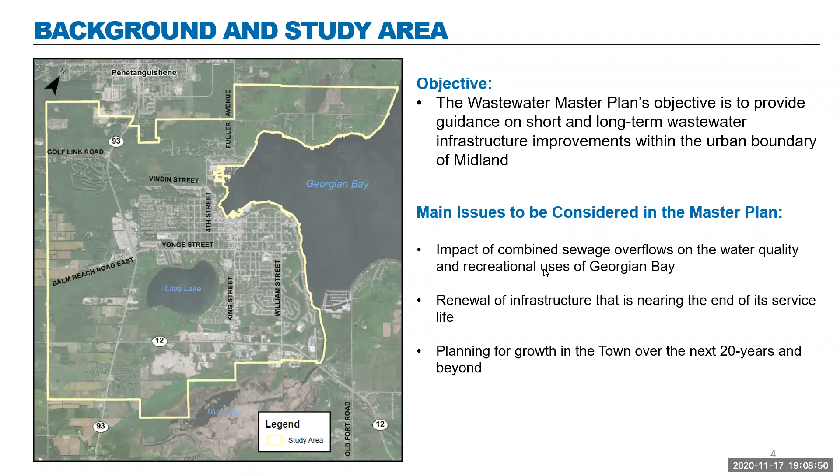Looking next at the specific objectives of the Midland Wastewater Master Plan. The goal of this master plan, and really of all master plans, is to put together a roadmap for infrastructure development for the near term and the long term, to make sure you can address the needs of the existing community and the future community. Specifically, we're looking at mitigating the impacts of combined sewage overflows on Midland Bay and Georgian Bay, the need for infrastructure renewal as infrastructure reaches the end of its life, and perhaps most importantly, planning for growth, looking at what we need to construct to meet the future needs of the town.

To do that, we've followed 4 relatively straightforward steps that I'll walk through tonight. The first is to identify the existing infrastructure, look at its existing capacity, how old it is, its performance, and then look at what is required for growth in the next 20 years, and we'll also look beyond the next 20 years. Then we've simulated or modeled what that future condition looks like to identify some of the deficiencies within the system as you start to accommodate that growth. Once you've identified the deficiencies, we'll look at ways to address them both in the near term and the longer term.

Before I get into the specifics of the system, does anyone have any questions on the master plan process or the process we followed throughout the study? Great, seeing none, I will keep going.

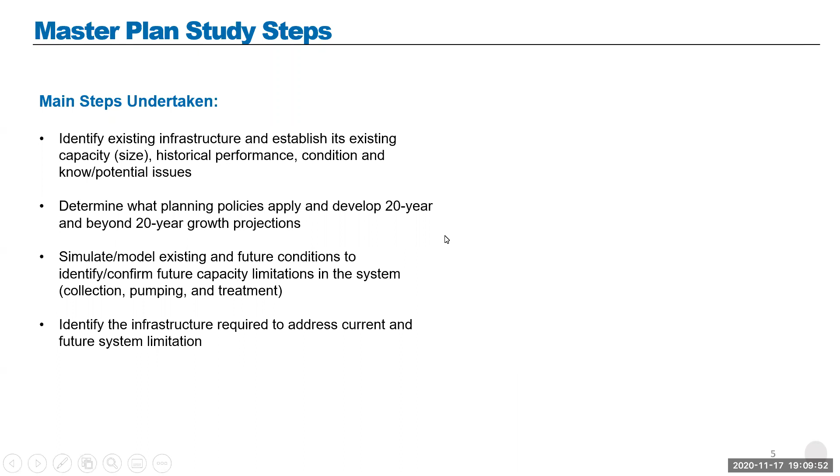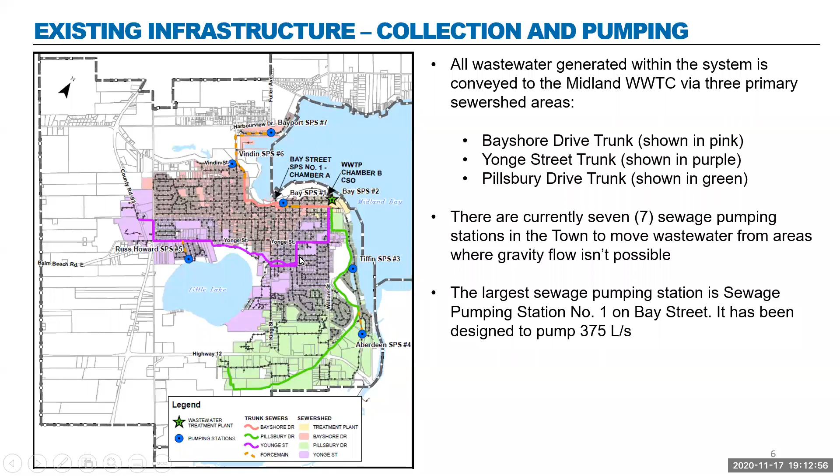The next thing we'll look at is the age of the collection system. There are pipes in the ground throughout Ontario that are well over 100 years old. That doesn't mean you should keep pipes in the ground for that long without replacing them. Typically, we look at replacing wastewater sewer mains around the 60-year mark, somewhere between 60 and 80 years.

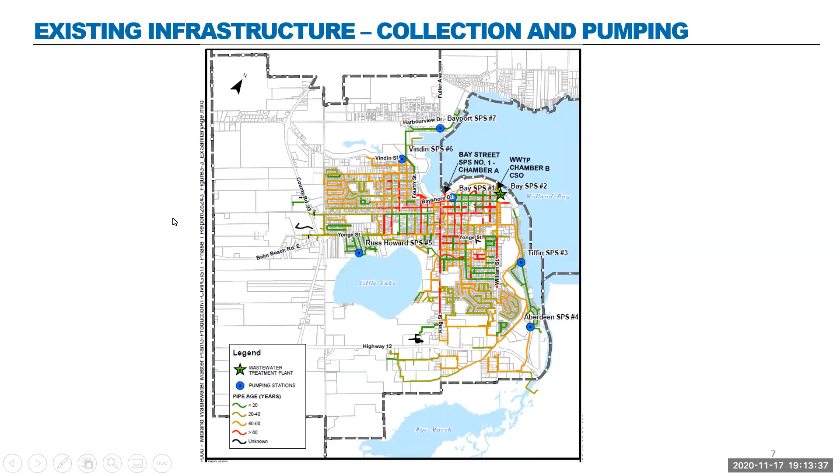If you look at the Midland collection system on your screen, the pipes in red are all those older than 60 years. Some of those sections have been replaced in the last couple of years, but you can see there are a number of sections in the original part of town where the sewers are older than 60 years.

Once we looked at the age, the next important thing was to look at the capacity of the existing trunk system. We want to make sure that when you flush the toilet, on an ordinary day or a very rainy day, there's enough capacity in these sewers to convey all of the sewage to the wastewater plant. We don't want it backing up into people's homes, and we certainly don't want flooding at the surface.

So what we did is we built a computer model to look at the impact of different rainfall events on the collection system. We ran the simulations for a 1 in 5 year storm, a 1 in 10 year storm, and a 1 in 100 year storm.

A 1 in 5 year storm is a relatively small storm that you would expect to happen approximately once every 5 years. These 1 in 100 year storms are much larger, and you would expect them to occur less frequently. However, you want to make sure your collection system can handle the flows that would occur under any of these events.

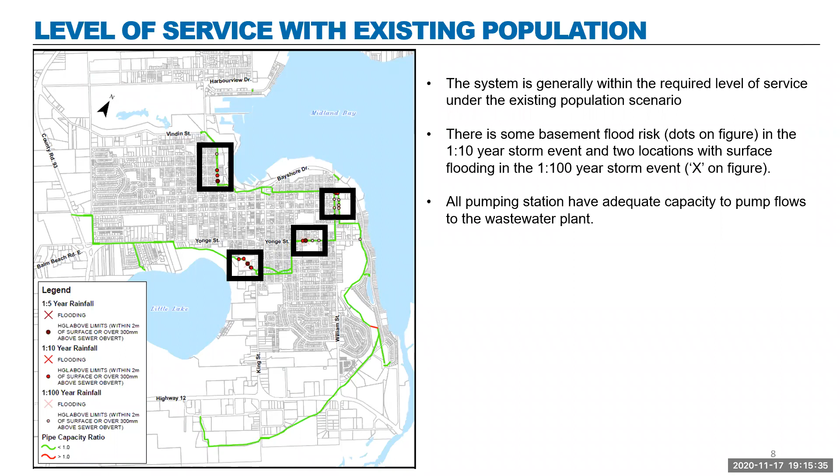So there's a need to increase the capacity of these sewers to make sure all the wastewater is conveyed to the plant, particularly during larger storm events where there's potential for larger flows in the system. Under the existing service population, all of the sewage pumping stations have adequate capacity to pump the flows. This means that at this point, most or all of the wastewater that enters the system is making its way to the plant.

Wastewater enters the front of the plant, which is called the headworks. Here is where all the bigger pieces of waste get screened out - things like sticks, flushable wipes, or rags. The headworks is there to catch those big things, so making sure you don't flush those down the toilet is important, as it makes the headworks' job much easier. That's the first stage in this process.

The next process is the primary clarifiers. In the clarifiers, the wastewater velocity is slowed down so that some of the smaller particles can settle out to the bottom of the clarifiers.

From there, the wastewater is sent to the aeration tanks. In the aeration tanks, like the name suggests, air is added, and this helps bacteria to grow - those bacteria are what help treat the wastewater.

From the aeration tanks, it goes to the secondary clarifiers, which work in a similar way to the primary clarifiers. Again, the velocity is slowed down so that all that bacteria and waste can settle out to the bottom of these tanks. From there, the wastewater goes for disinfection. Because it's being discharged to Midland Bay, it has to be disinfected, in this case with chlorine.

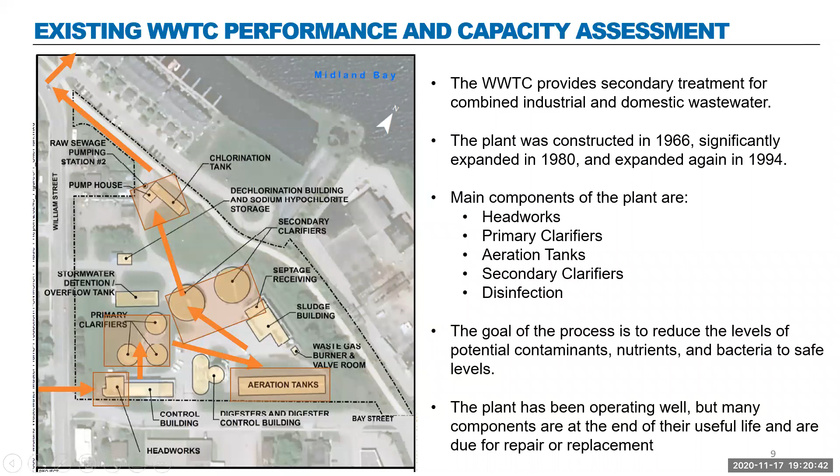Great, all right, I will keep going. In Midland, you are in the unique, although not that unique, position of having combined sewers. Combined sewers are when you have storm sewers that tie into your sanitary sewer. This means under wet weather events or rainfall events, storm water mixes with the sewage and has the potential to overwhelm the system.

And so when this happens, right now at the plant and at Chamber A, which is at the main sewage pumping station, a bypass occurs of this combined sewage, which is a mixture of mostly rainwater and some sewage. This occurs almost every year in Midland, and there are standards set out by the Ministry of the Environment to mitigate the risks associated with these combined sewer overflows on the environment.

Some of the key requirements of that procedure are that combined sewage overflows can't occur during dry weather periods. This means you can only have bypasses of the plant during a wet weather event. During the wet weather months, from April to November, 90% of the wet weather flow has to be captured or treated, so only a maximum of 10% could be bypassed. And as your population grows, there can be no increase in the volume of waste or wet weather flow that is bypassed.

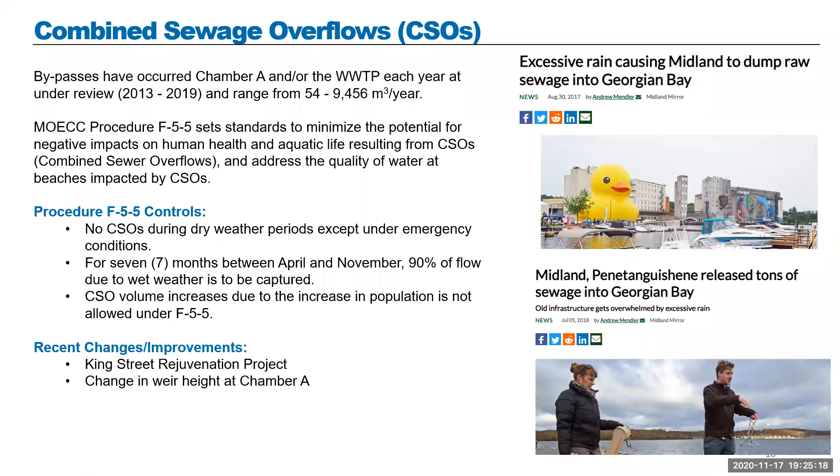Great, so that's the collection side of the combined sewers. I want to talk briefly about what happens at the plant during these big events. Right now, when you have a big storm, wastewater starts entering the plant just like it always does. Once the capacity of the plant is reached, the surplus flows are diverted to an equalization tank, which is just a big tank that fills up with the combined sewage. Once the storm is over, it can be pumped back to the plant and treated the usual way. This is what happens during, let's call it, a medium storm.

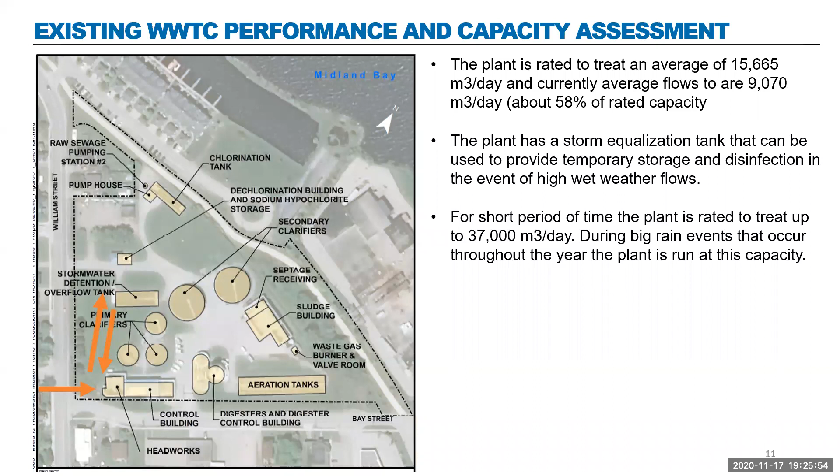But during a very large storm, wastewater comes into the plant, it accepts as much as it can, and once that capacity has been reached, flows are diverted again to the equalization tank. If it looks like the equalization tank won't be able to hold all of the flows coming in, the plant is then bypassed, and these flows go out through the outlet into Midland Bay. Some treatment occurs, but not the same level as if the combined sewage was treated through the entire plant. As I mentioned before, these bypasses are permitted—there are safeguards in place to protect the environment while they occur, but there are guidelines that limit the increase of this volume, so over time you can't see more volume of stormwater bypassing the plant.

So are there any other questions on the existing conditions of the system before I keep going?

The main takeaways from the first part of the project I want to highlight are that both the collection system and the wastewater treatment plant have components getting near the end of their useful lives, so there's a need to renew this infrastructure. And Midland does have combined sewers, so you're always going to face this issue of what to do with wet weather flows.

The next part of the master plan was to look at growth.

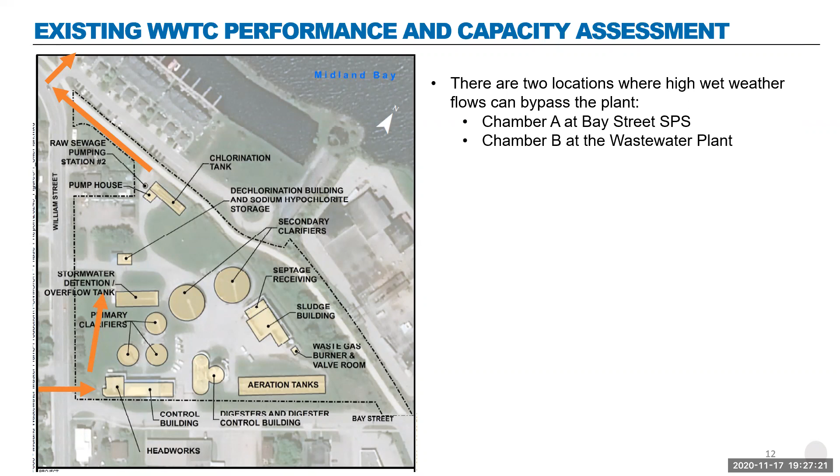Sorry, there was a question on the equalization tanks before I go on. So yeah, you're jumping ahead, Councillor Main. We will get to the need to potentially expand the tanks or the treatment capacity.

So we're almost there. Looking now at growth, a key part of the master plan, after we've identified the existing conditions and existing constraints, is to identify when and where future growth will occur, to look at the future implications on both the collection system and the wastewater treatment plant.

Within the next 20 years, approximately 3,000 new residential units will be built, and approximately 33 hectares of land will be required for employment purposes. So what we've done is looked at all the areas that have potential to be developed, and divided those units and the hectares of employment land between those areas to get an initial assessment of what the 20-year scenario will look like.

We also look beyond 20 years to full build out of all these areas. This is because there's a pretty good understanding of the total amount of growth that will occur in Midland over the next 20 years, but it's very difficult to predict where that growth will occur. A parcel of development in the north doesn't impact the same infrastructure as a parcel of development in the south, so we looked at full build out of each of three main areas.

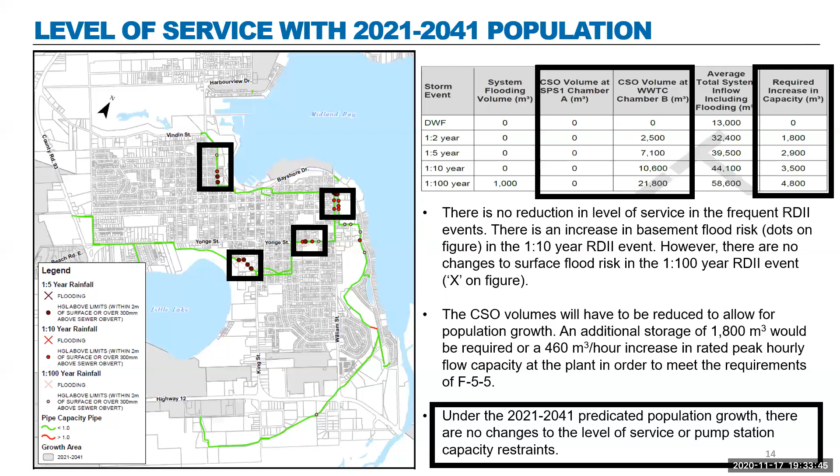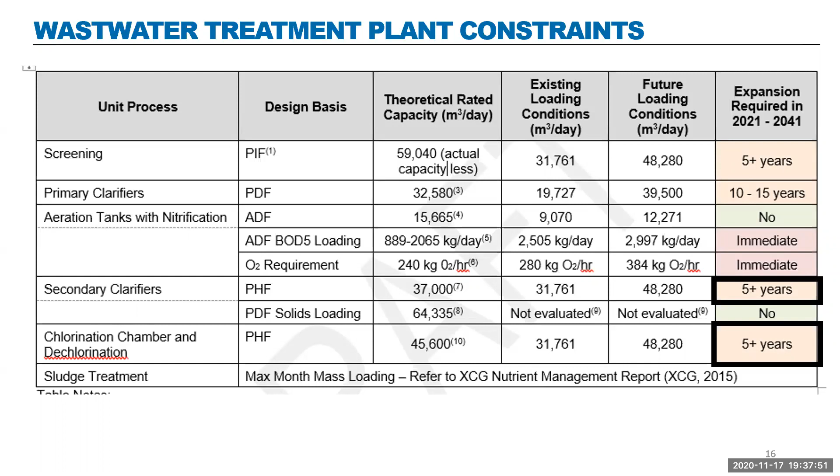I've got a question on, do we still process septage? And the answer is yes. As part of this master plan, we included septage in the calculations on the loading to the plant. We assumed that the septage receiving facility would be used to its maximum capacity in the future, to make sure there's adequate treatment capacity in the plant to process that waste, which is higher in strength than traditional wastewater because it's less diluted. I'll talk a little more about septage when I get to the plant slides.

So just to summarize, in the existing conditions most components of the system have capacity. As we start to look to the 2041 scenario, there start to be constraints at the plant, and that's true beyond 2041 as well. In the pumping stations, the main pumping station starts to reach its capacity near the end of 2041, and the Bayport sewage pumping station's capacity is exceeded in the beyond 2041 scenario.

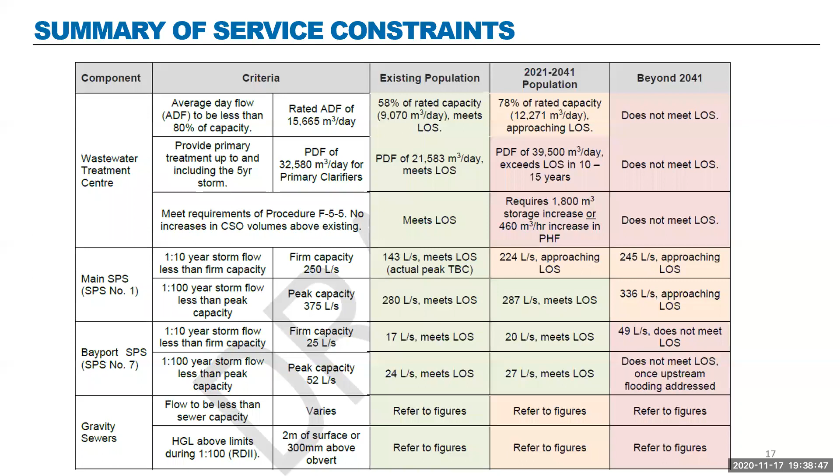Looking at the gravity sewers, taking the timelines out of it because they're very dependent on where development actually occurs, there are potential constraints within the existing collection system along all of the trunks, particularly along Pillsbury.

So the first constraint we looked at addressing was related to the Pillsbury trunk. We looked at 3 different options to address that constraint. For all situations, there is a need for a pumping station, so that will be common to all options. In the first option, we looked at constructing the pumping station and then pumping into the top end of the existing Pillsbury trunk, and then upgrading the Pillsbury trunk downstream of that connection point.

In the next option, you have the same pump station, but in this case it pumps north to the Yonge trunk, so no upgrades required along Pillsbury, but a short section of Yonge would need to be upgraded to accommodate those flows. In the last option, again you have a pump station, but the force main connects further upstream in Pillsbury near the intersection of Highway 12 and William, so you avoid that section that has low capacity. There's still a short section downstream that needs to be upgraded, but not the whole section.

We evaluated these based on a number of environmental, technical, and economic criteria. Ultimately, the option we've selected is pumping up to the Yonge trunk. This has the advantage of being less expensive because there's less infrastructure that needs to be upgraded. It's also advantageous because eventually there will likely be a water main that comes down along that same corridor, so the force main and water main could be constructed at the same time, meaning you don't have to tear up two separate sections of road to implement this project.

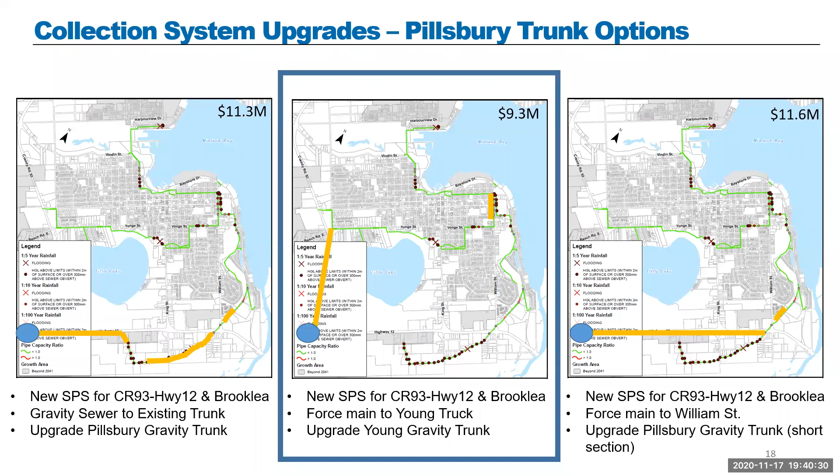The next set of options we looked at was what to do with that additional wet weather flow at the wastewater treatment plant. There are really two options: the first is to treat that additional flow during the wet weather periods, and the second is to expand the equalization storage so you can divert the flows and then pump them back to the plant once the storm is over. Under both options, there are a number of upgrades required at the plant that are independent of the options. I'll walk through those first, then look at the components specific to the wet weather flows. So I mentioned earlier the headworks.

It's due for life cycle replacements, and its actual capacity is less than its design capacity, so it needs to be expanded to reach that capacity. The aeration tanks and aeration equipment need to be replaced to ensure adequate oxygen to treat the wastewater. That deficiency exists under current conditions, but this would be designed to treat future flows as well.

For the chlorination, dechlorination system, there's interest in potentially switching to UV, and that would be considered under both options. Under the option where the plant is expanded to treat flows, that disinfection system would also need to be expanded. For the septage receiving station, there are concerns about odor impacts, so odor control upgrades are needed there.

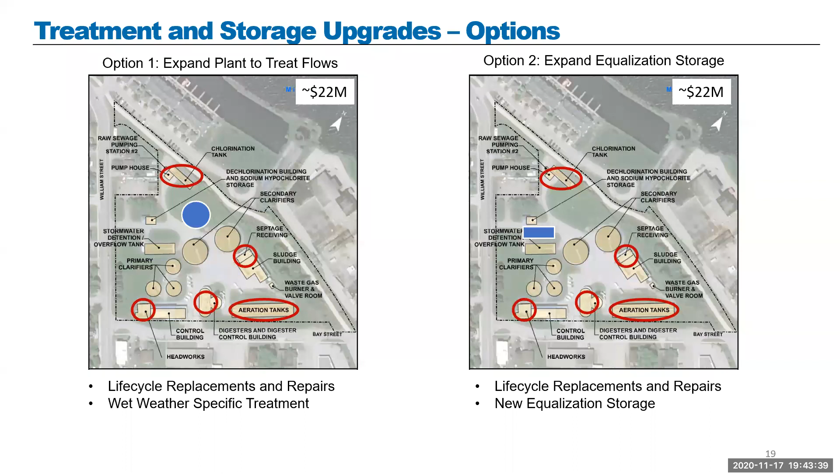A lot of changes took place over the course of this master plan that may impact the direction this takes or the capacity required. Ultimately these projects will be required, but there's an opportunity to reevaluate which direction the town goes with respect to treating those peak flows or expanding the equalization storage.

Overall, looking at all the required projects, the first is the upgrade of the wastewater treatment plant. The next, which I forgot to mention earlier, is to address the capacity issue at the Bayshore pump station—that pump station would need to be expanded or a new one constructed to service those lands, along with a force main to connect it into the Bayshore trunk.

There are also a few sections of Bayshore that need to be upgraded, and the Young trunk has a couple of sections that need upgrading. There would be a new Pillsbury trunk sewage pumping station, which pumps into the Young trunk, with an associated pumping station and force main. There's also a short section of the Pillsbury trunk that needs to be upgraded just upstream of the wastewater treatment plant.

In addition to those projects, the town should continue to monitor wet weather flows in the collection system and at the plant to help prioritize projects within the collection system, which may help mitigate impacts on treatment requirements at the plant. There's also further investigation required at chamber A—there could be constraints on the stormwater side, not related to wastewater, that need to be evaluated to make sure stormwater can actually get out of that chamber and isn't overflowing and backing up into the wastewater side.

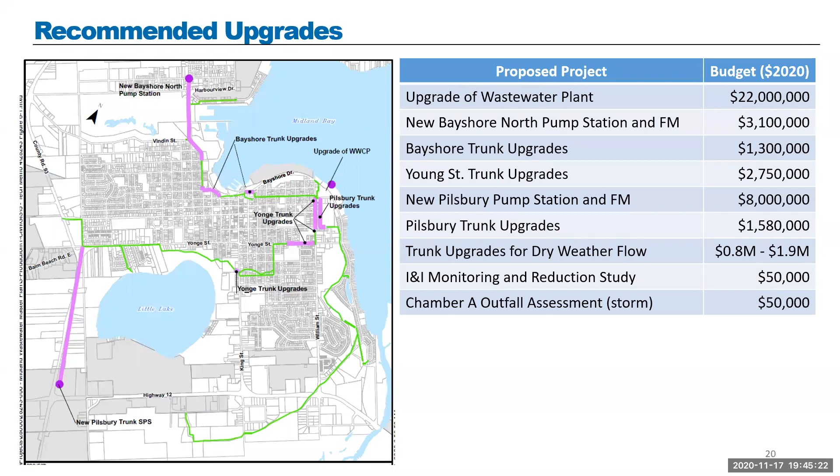The last part of this, and probably the most important part of the Class Environmental Assessment process, is looking at the environmental considerations associated with the options being reviewed and recommended. The first on this list is odor control, which is certainly a concern when you have residential areas near a wastewater treatment plant.

And so that's partially why the recommendation is to add odor control at a septage receiving station.

The next thing we look at is location of vulnerable areas to protect source water protection. In this case, the impacts are relatively modest. The overall capacity of the plant isn't recommended to be changed, it would just be the capacity to treat those high wet weather flows, which occur for a relatively short duration.

And then we looked at the environmental and natural heritage features. Because this site is an existing development, there's anticipated to be not a lot of impact to ecological or cultural heritage features. But because it's located within 300 meters of a major water body, there's potential for archaeological features to be unearthed during construction, so that would need to be reviewed prior to any construction on this site.

So I have a question here about whether there was any possibility of a second new wastewater treatment plant to handle much of the new developments and relieve the old plant.

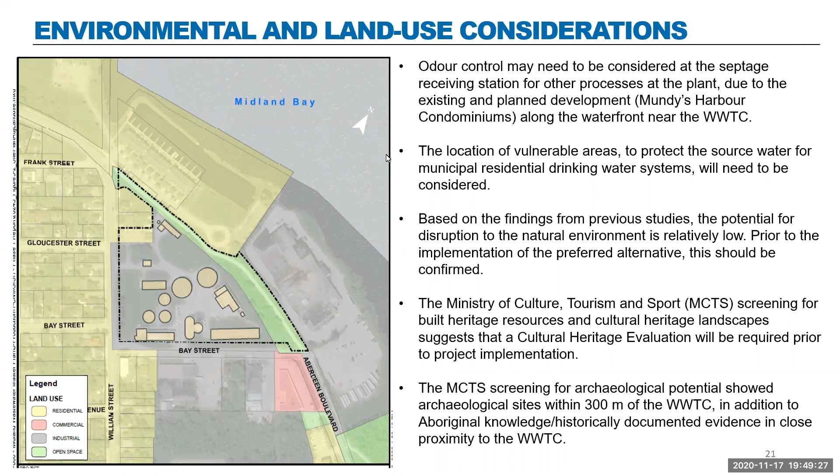And so that brings us to the end of the formal portion of the presentation. I just want to circle back on the requirements of the municipal class environmental assessment process. Under this process we need to follow these two phases: identifying the problem and opportunity, which we've done, looking at the issues and identifying potential solutions to address them.

And now we're at that public consultation phase, so we can put a check mark next to hosting the Public Information Center. Once you've asked questions and we've answered them, it will be documented in the draft project file report, which will be presented to council. Then once it's been presented to council, it will be issued for the 30-day formal review period.

I certainly encourage anyone who has questions or comments, if there's something we missed or should consider that we haven't, now is the time to bring it to our attention so it can be included in that draft report, or at least considered before that draft report is issued.

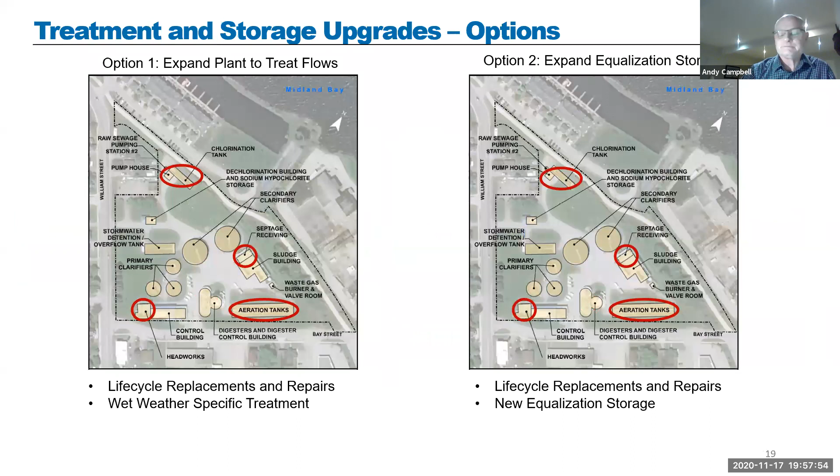And if that development that was shown earlier, Jane, maybe can you flip back to that development screen? Is that the one, Andy? I'm not seeing it yet. The one that has the development areas, that one.

So you see at the top, on Brunelle Side Road, there is a large parcel of land that is zoned to be residential at some point. And if that development ever goes ahead, they will have to connect to our collection system. And as a result, the pipes will go through the existing Sunnyside area.

From a cost point of view, bringing individual services to the existing homeowners is likely in the $20,000 to $30,000 range. That would have to be funded by the homeowners. If a developer is putting some of the infrastructure in to support the new subdivision, that would reduce that cost. So at this point, the town doesn't have any plans to put collection into the existing residential development in Sunnyside. We don't have a timing for when that developer who owns the land to the north would be going ahead, but if they do, that would be the time.

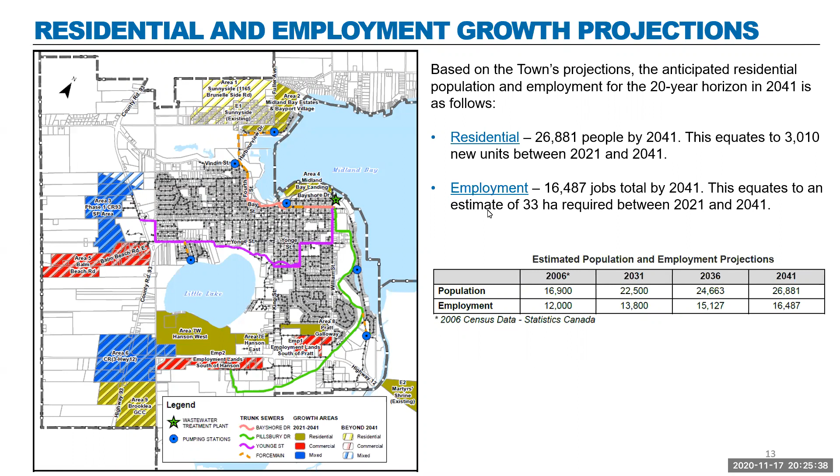I'd like to thank everyone for joining us tonight. Again, this is an ongoing process - this is a public information session, and we're taking your comments tonight. There'll be an opportunity for you to submit written comments you'd like us to include as part of the municipal class environmental assessment. Any written correspondence with questions, we have to include in the public documents that go to the Ministry of the Environment for review, and we have to comment on them. At this point, this study will be wrapping up in January. We'll be taking a report to council either in February or early March - we have to see how many comments we get and how much other analysis we need to do. Then when this report goes to council, that's when the official 30-day comment period happens again before we finalize it with the Ministry of Environment.